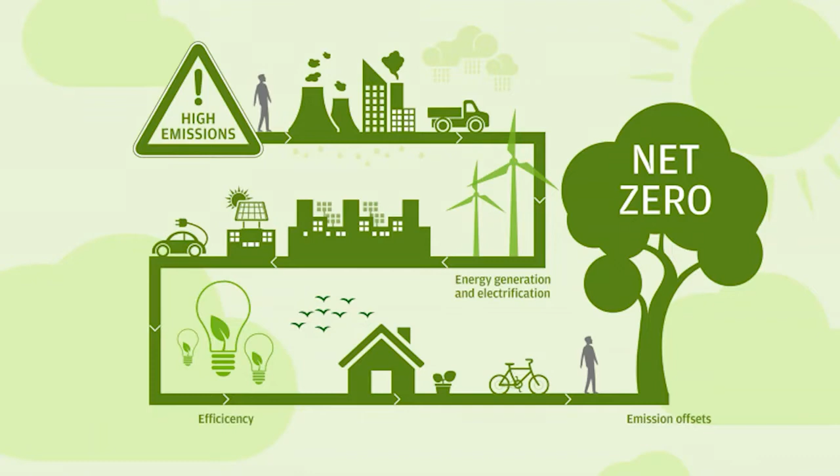Industries in Sri Lanka are trying to reduce their carbon emission because of the pressure from their clients in European and American countries. The carbon dioxide emission from electricity consumption plays a major role in overall carbon dioxide emission of industries. To achieve the net zero emissions targets, it is important to monitor the emission from power consumption, but in Sri Lanka there is no platform to monitor carbon emission or provide emission-optimized energy solutions.

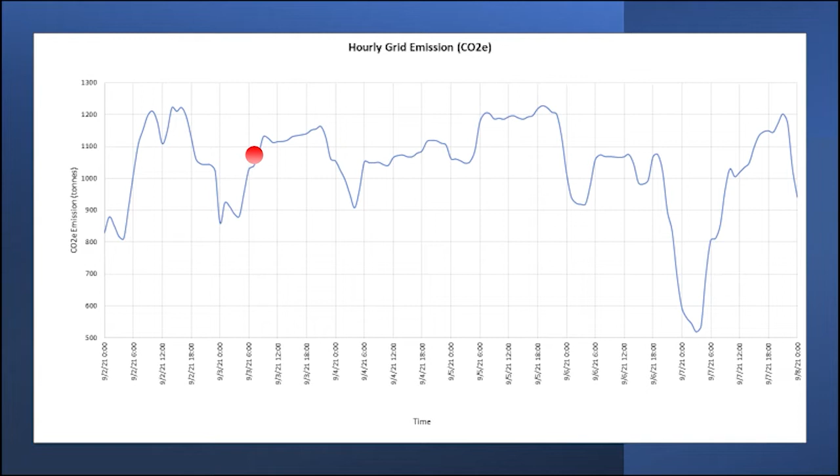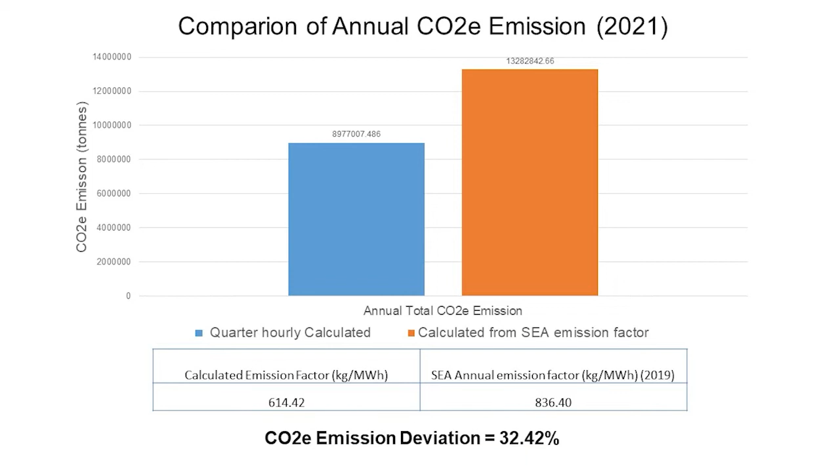Thus, our team has decided to provide a solution for this problem under the topic of 24/7 renewable energy traceability for Sri Lanka. The quarter-hourly carbon dioxide emission and emission factor for the electricity consumption are calculated according to the IPCC checklist method. It shows total carbon emission values of the Sustainable Energy Authority in 2019 and calculated values with actual quarter-hourly generation data has 32.42% deviation.

The possible reasons for the difference between the emission values are: the latest available SEA emission factor is for 2019. However, compared to 2019, 2021 has lower thermal generation, 50% hydro. According to CEB, the SEA electricity emission factor is calculated based on the overall energy flow of the country at a macro level. In our model, the emission factor is calculated based on generation from each power plant. Emission factors used for each plant are obtained from IPCC's Special Report on Renewable Energy Sources and Climate Change Mitigation. They might vary from actual emission factors.

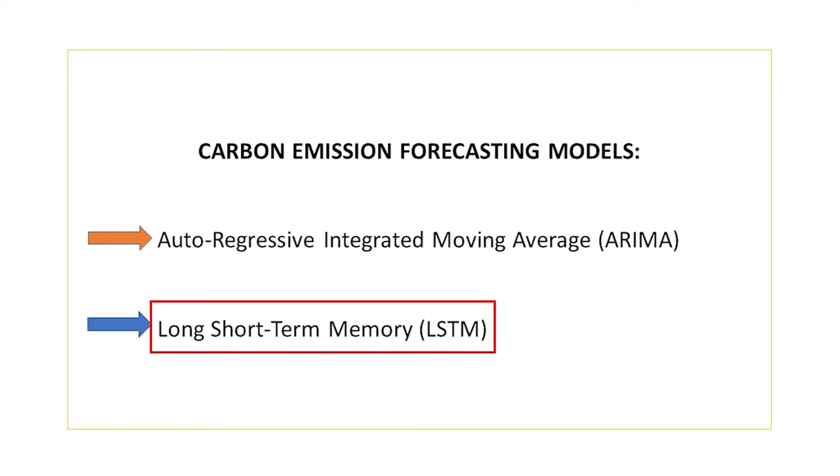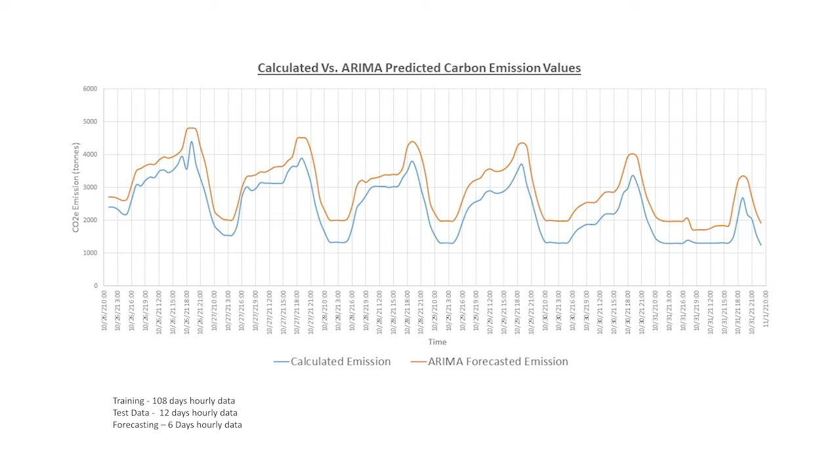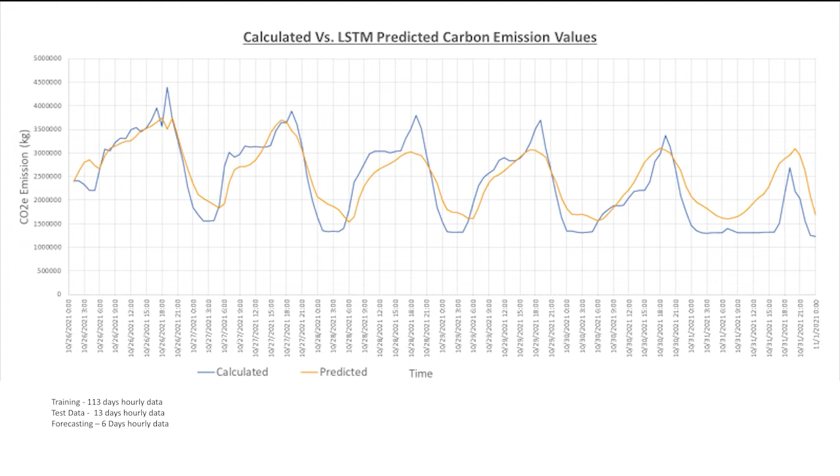In order to develop the carbon emission forecasting, initially we use the ARIMA model and then the LSTM. In the ARIMA model, 108 days hourly data is used for training and 12 days as test data. The model forecasted the emission values for next 6 days. From the comparison with calculated emission data, the mean absolute percentage error was calculated as 29.34%. In LSTM, 4 months hourly data was split into 113 days as training and 13 days as test data set. Then the validation of the testing data set for 1 week. Here the mean absolute percentage error for validation dataset is 19.17%, as shown in the graph.

When considering the factors such as ability to identify the seasonality, most suitable time series data type, availability of data and ability to capture linear/non-linear patterns, the LSTM model can give better results compared to the ARIMA model in this given scenario. Also, this clearly shows with the achieved results for mean absolute percentage error, LSTM model is the better option for the carbon emission forecasting on hourly basis.

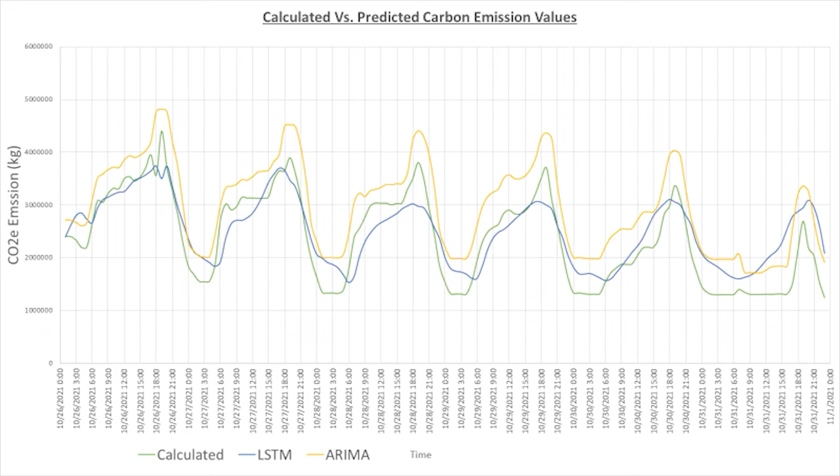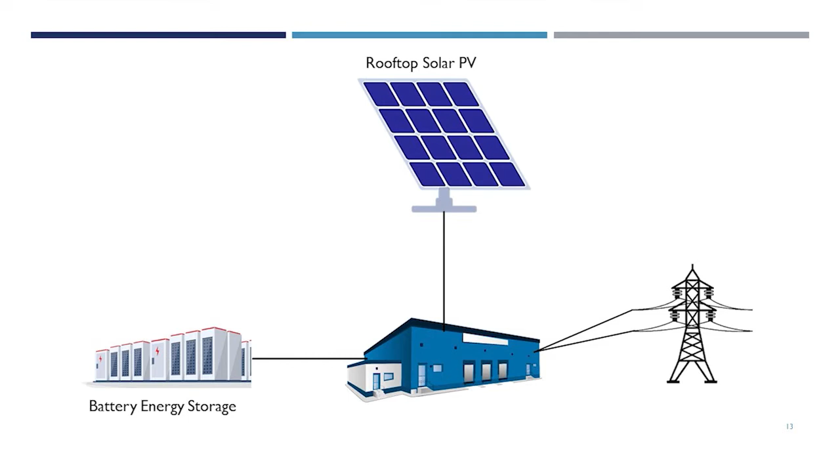In order to reduce the carbon dioxide emission from electricity consumption, multiple power supply configurations such as only grid connection, with the solar PV and with the battery storage. With solar PV and battery storage, the maximum capacity of the installable solar PV is calculated based on the available rooftop area of the buildings. The battery capacity is calculated based on energy consumption during high emission periods. An apparel manufacturing facility located in Kahawatta, Ratnapura is selected for this study.

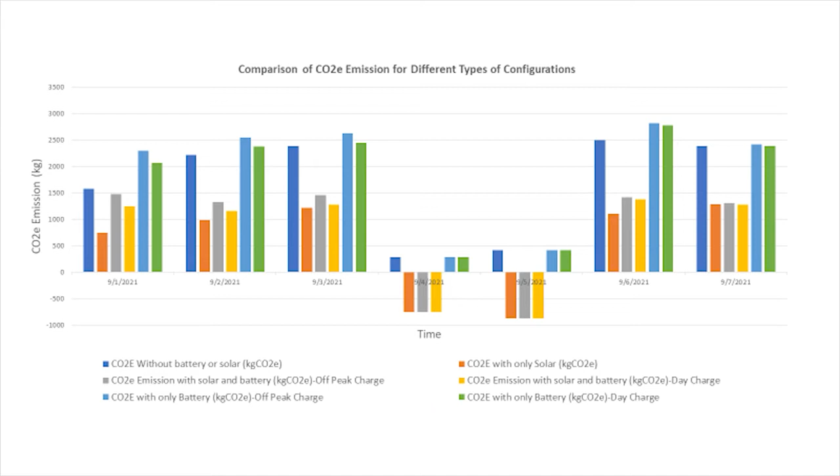The energy requirement of the facility during peak hours is 1,268.50 kWh. The peak installable solar PV capacity is 896.88. The calculated battery capacity is 2,137.50 kWh. When comparing the CO2 emission from different configurations, grid connection with solar PV has the lowest emission and grid connection with battery storage has highest emission.

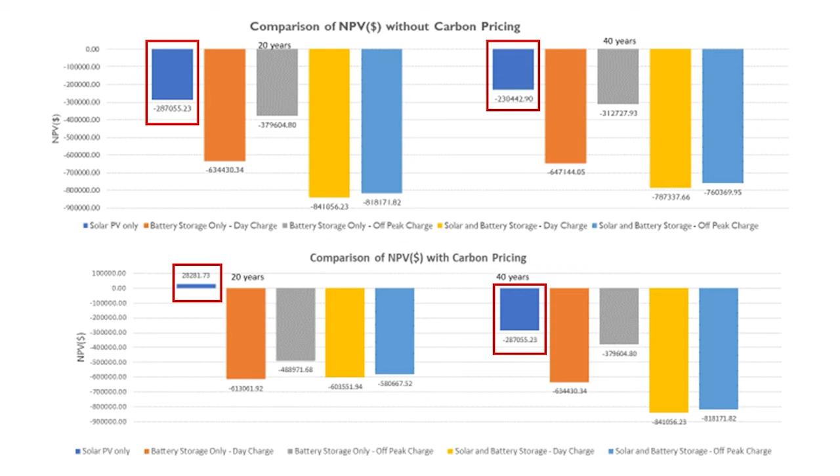Afterwards, a financial feasibility study was conducted with financial indicators of net present value, internal rate of return and levelized cost of energy. For all configurations, it was done considering carbon price value and without considering carbon price value to apply for the current Sri Lankan context, as well as considering lifetime 20 and 40 years. The highest NPV value has been received for solar PV only for all the cases, and the lowest NPV value is for solar PV and battery charge during daytime for all the cases except the case for 20 years. With carbon pricing, the lowest NPV value is battery storage during day charge only option.

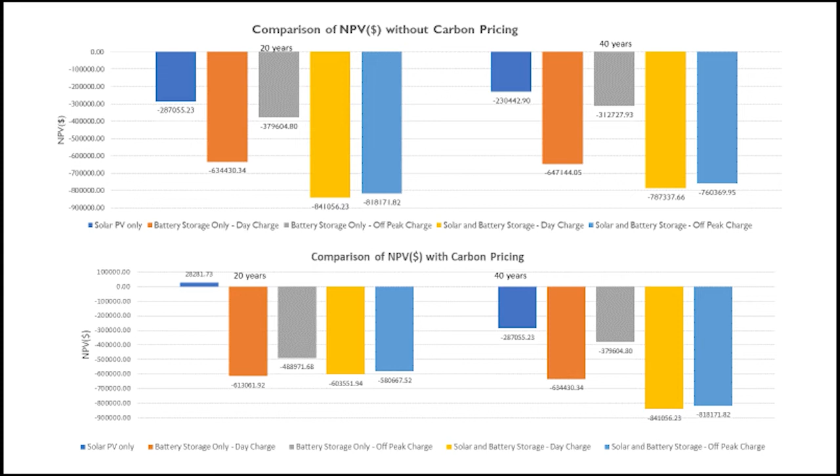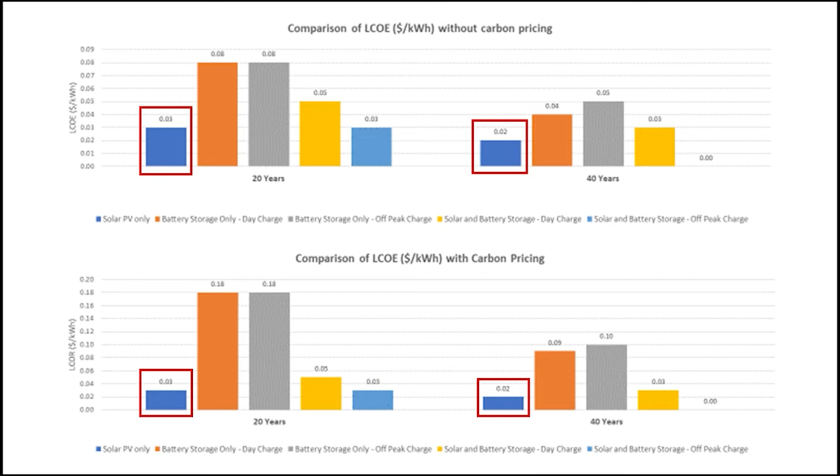The highest IRR value for all the cases is for solar PV infrastructure. The levelized cost of energy financial indicator also again proves that the lowest LCOE can be obtained for solar PV infrastructure. To conclude, to reduce the CO2 emission of the electricity consumption, solar PV system is the most economically feasible option to implement for considered scenarios.

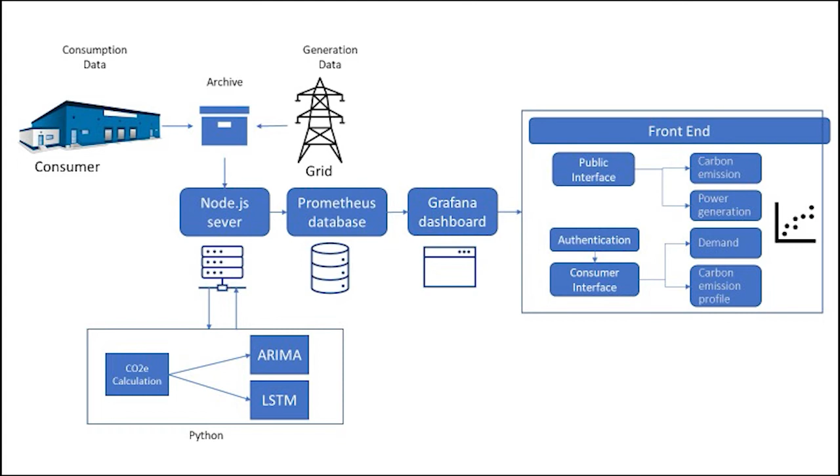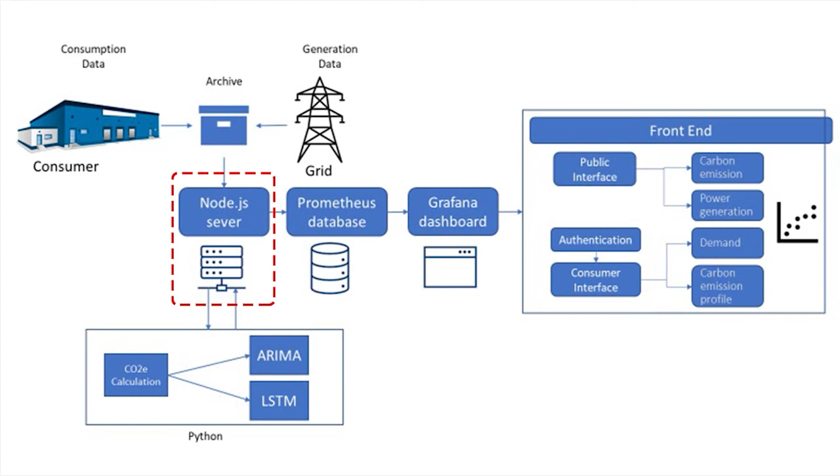The web platform provides visibility to grid generation and emission to the public and consumer emission profile for the client with login credentials. The generation data received from CEB and consumption data received from the industrial consumer are stored in an archive and read in every 15 minutes by the Node.js framework-based backend server. The quarter-hourly carbon dioxide emission and emission factors are calculated through Python. Using the calculated emission factors, the consumer emission is calculated.

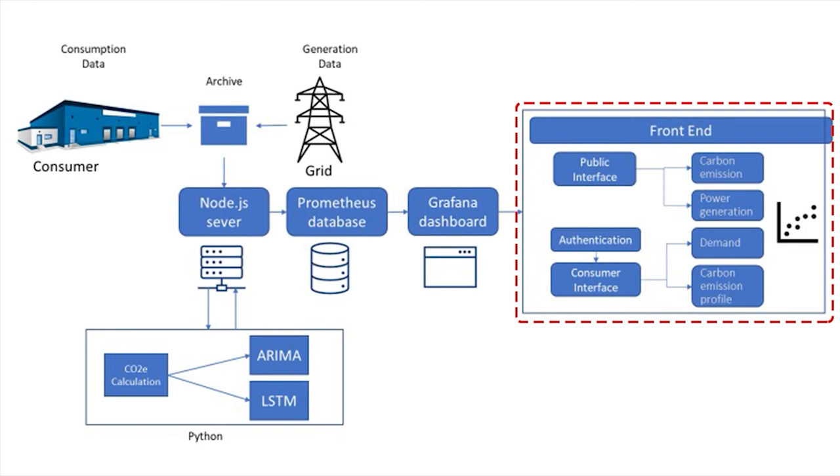Then the ARIMA and LSTM models take the calculated emission values as input and predict the emission values for next 6 days. The backend server sends generation data and all the calculated data to the Prometheus database. Thereafter, the Grafana dashboard gets the data from Prometheus and plots in respective graphs. Finally, the React framework-based front-end receives the graphs displayed on the relevant interfaces.

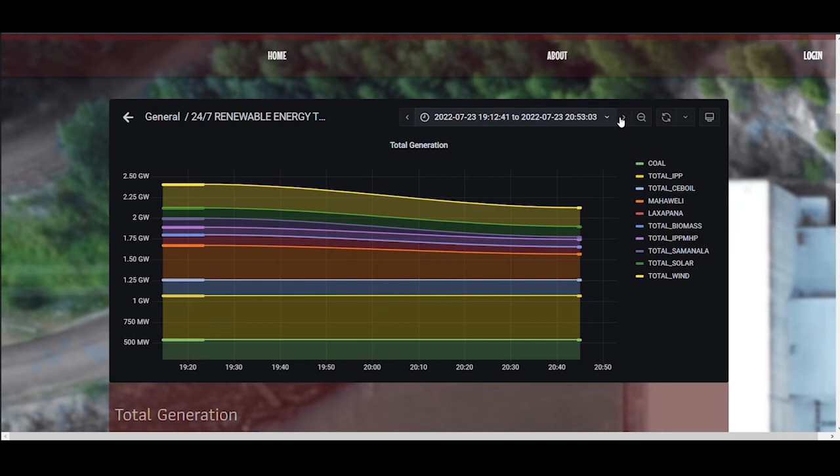The grid generation and carbon dioxide emission can be monitored in the public interface in a quarter-hourly interval. The homepage firstly shows the generation data. This shows the fuel-wise generation. The graph is updating with 15 minutes time intervals. Using the cursor we can read the data as well. Historical data can be viewed by selecting the time frame. Here we can see the total carbon emission. Next it shows the variation of grid emission factor. The final graph updates the LSTM forecasted emission values.

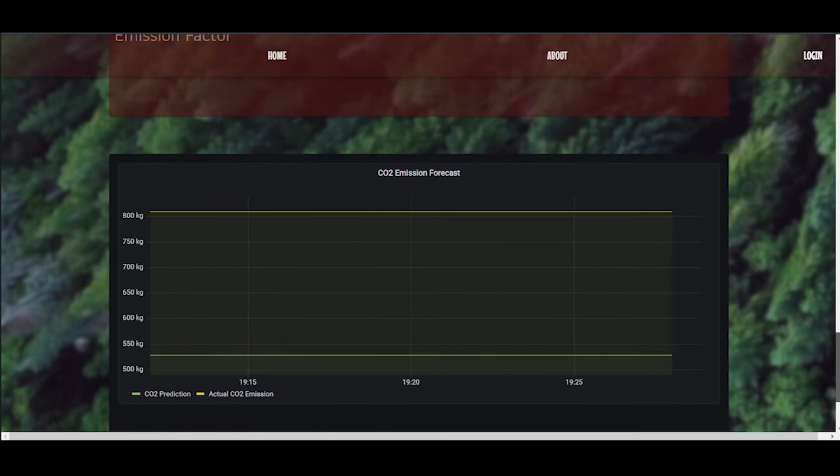The consumer interface can be accessed from the login menu. Using the user credentials, industrial consumers can log into the private interface. Hourly energy consumption and CO2 emission of the consumer can be monitored here. Based on the consumer requirement, the interface can be further customized. Our web platform for the carbon emission monitoring and forecasting graphs can be integrated with any websites from the Grafana interface. Thank you.